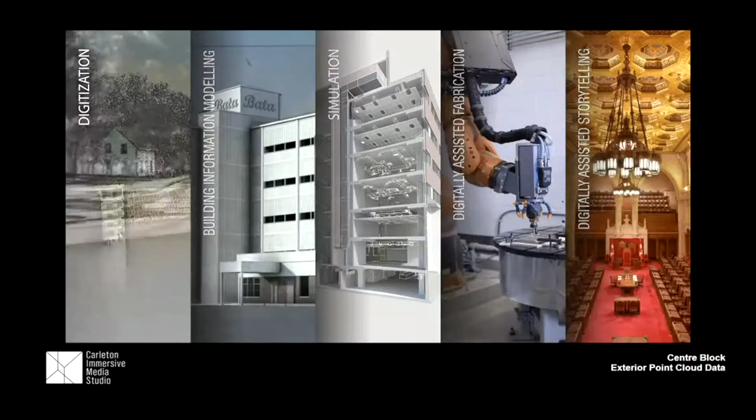As introduced, my name is Katie Graham, and I work at the Carleton Immersive Media Studio, which is a research lab associated with the School of Architecture in Ottawa, Canada.

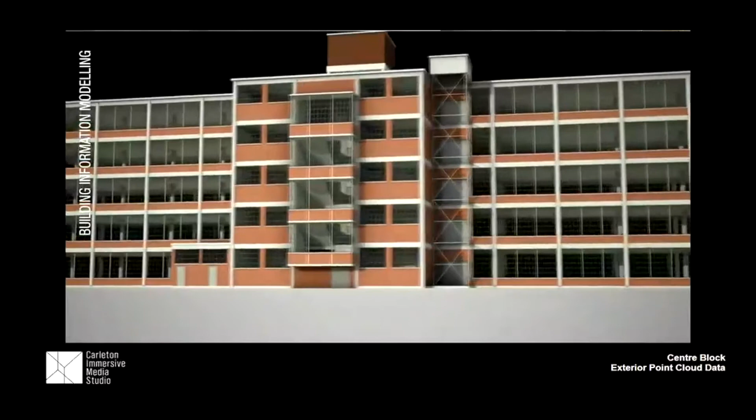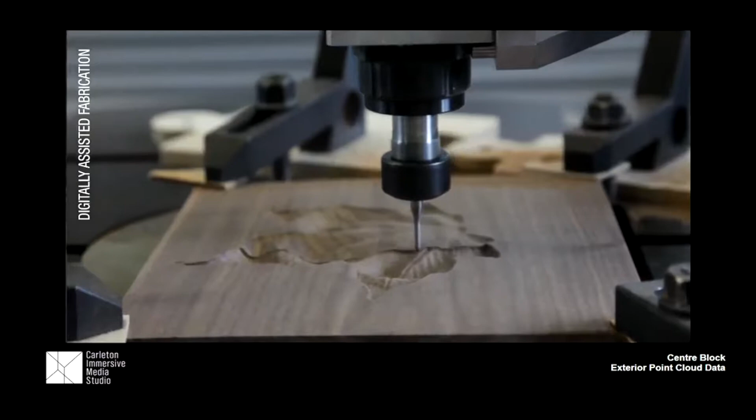We focus on 5 different streams of research that all have to do with how we can use new and emerging technologies to help in heritage architecture. The first is digitization, where we do point cloud and photogrammetry to record the heritage spaces. Building information modeling, where we convert that data into a model using Autodesk Revit. Simulations, where we use those models as an analysis tool. Digitally assisted fabrication, where we have 2 KUKA robots that are 6-axis robots that we use to assist in different milling for heritage purposes. And digitally assisted storytelling, where we take all of that information and figure out a way to share it with the public.

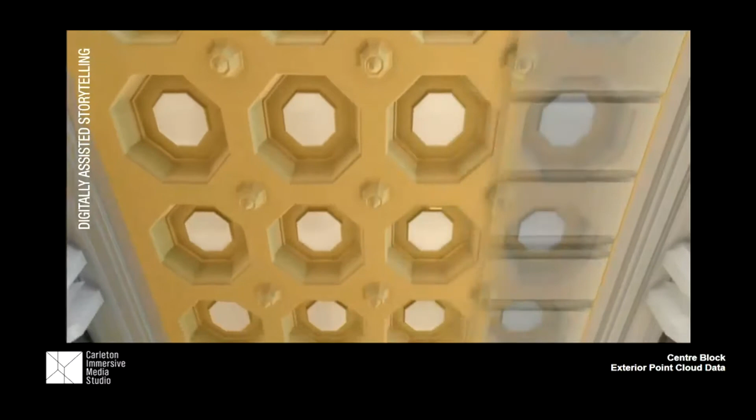I am the team lead for the digitally assisted storytelling projects, where we use web, mobile, augmented reality, and virtual reality for this dissemination. Today what I'm going to be talking about is how, for some of these projects that focus on virtual reality, we've used some of the things we've learned from building information modeling and the level of detail system there to help create narratives that flow better, a level of detail for narrative spaces in virtual reality.

Hold on. We can also use the keyboard. Okay, yeah, maybe it's a disconnection. All right, so technical difficulties.

Many of our projects revolve around a significant project within Ottawa, the rehabilitation project of the Canadian Parliament buildings. This is the Centre Block, the main building of our Canadian Parliament buildings. It's about to undergo a 10-year rehabilitation project, which will close its doors, and all the parliamentary activities within it will have to move elsewhere, and the public tours common for school students and visitors to Ottawa will stop. So our work has a lot to do with that.

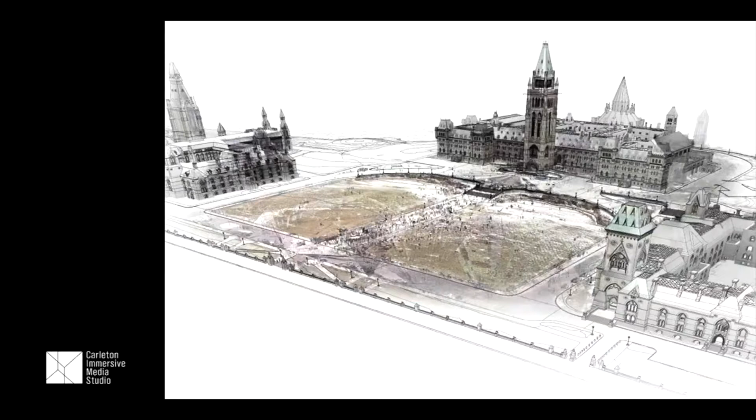We've actually been working with the Canadian government since 2013 on this rehabilitation project, when we began to help them document the overall grounds, which you can see here. This is Parliament Hill, and then we have the East Block, the West Block, and Centre Block. We helped document them through photogrammetry and point cloud data with another government agency called Heritage Conservation Services. Then we converted that data into a building information model using Autodesk Revit.

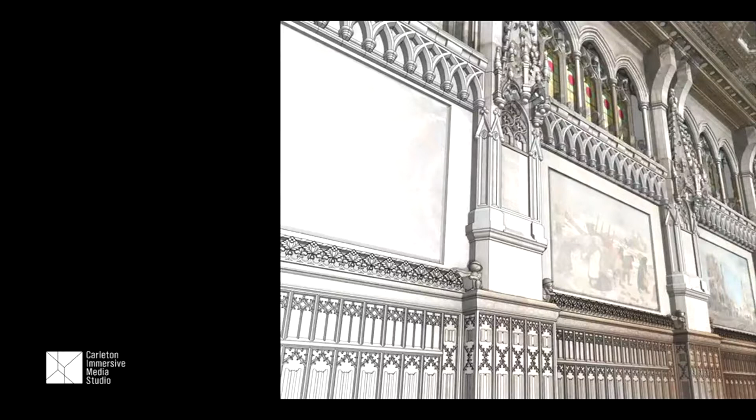Here you can see just how detailed our point cloud data are of the space. We have both interior and exteriors of all of the buildings. We've converted them into extremely high detailed models within Autodesk Revit. This is a detail of that building information model of the Senate chamber wall.

When we were developing these building information models, we were looking at the different level of detail systems that currently exist for building information modeling. I'm not really going to explain these since we already talked about them a bit today. But the thing we noticed in all of these existing protocols is that they all have to do with new construction, and with the different phases of construction as you move from design to the actual building being built and facility management. That level of development or level of detail kept progressing based off of that.

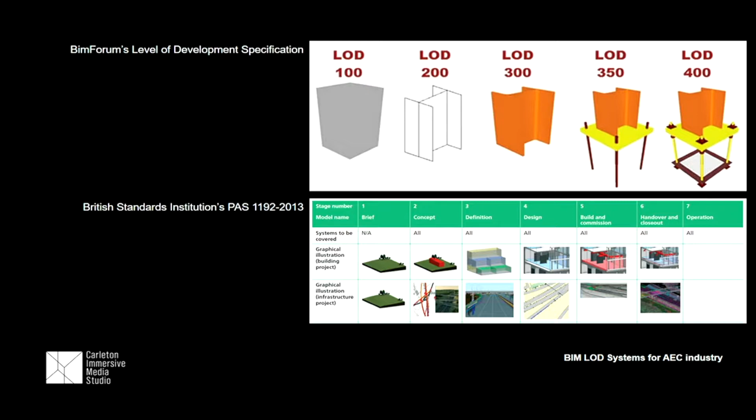But when we're looking at a heritage building, we're already at the built stage. So what level of detail do we put it in? We needed to figure out a different way to control what level of detail we should show within our models. So we created our own system that had a different purpose, and also a different approach, breaking it into 3 different categories.

We had the level of detail, which was the graphical information, the representation. We had the level of information, about the embedded information within it. And then the level of accuracy, about whether we were recording the different deformations and deflections that occurred within the model as recorded in point cloud. These were 3 different categories we could split apart so a different element within the space would have a different LOD, LOI, and LOA based on the information we had.

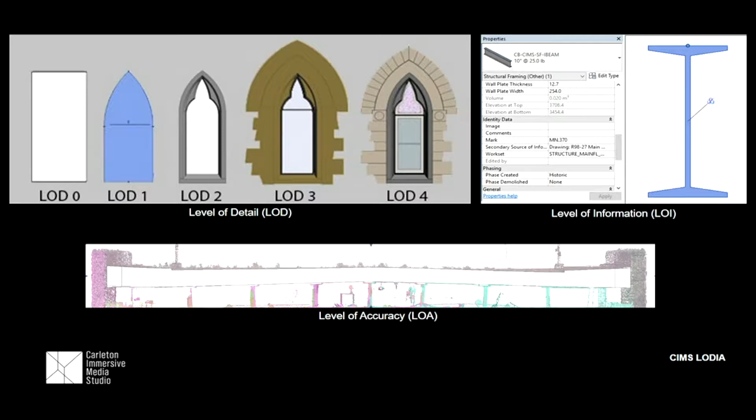So, as I said, I'm the team lead for the digitally assisted storytelling projects, and we've had a few different virtual reality projects that both have different passive or active qualities.

And then we stitched them together using Adobe Premiere and Adobe After Effects. There were also sound effects, some animations within it, as well as a narrator explaining what's going on in the space.

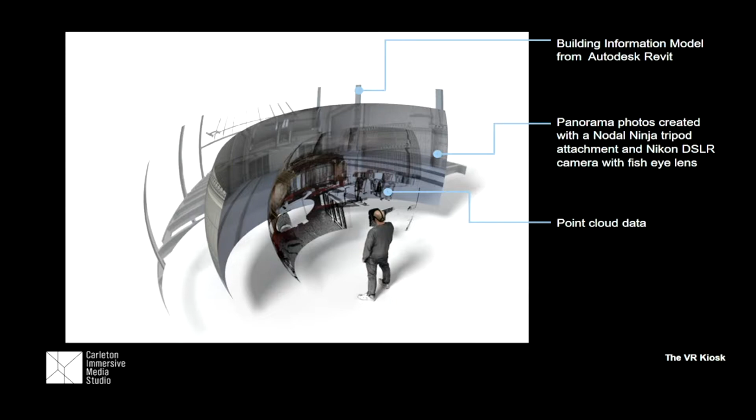So this is kind of some of that feel within it, this compiling of all the different details within it. And we were able to get some really good high quality images out of it.

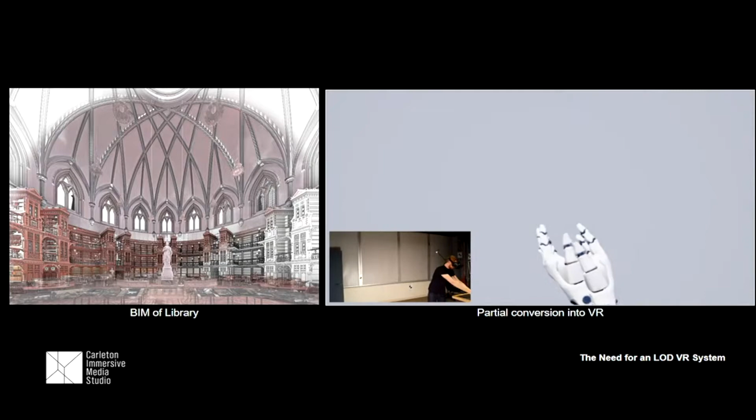But when we switched to active VR and the use of game engines, we no longer had a rendered output. We needed to have everything be viewed in real time. So you can see, which had a lot of problems considering our data was so highly detailed.

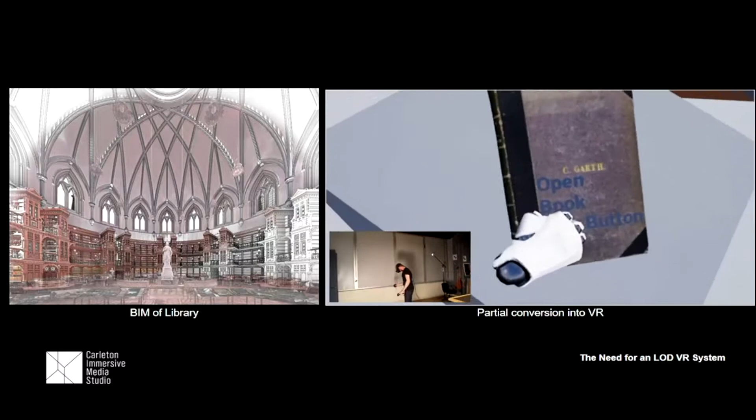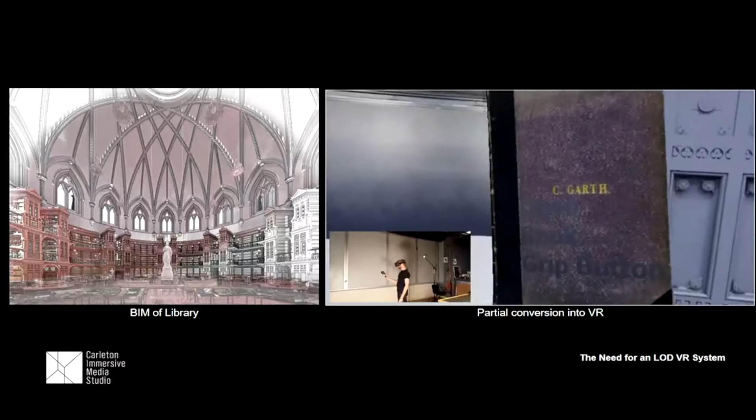So we have on the left the building information model of the Library of Parliament, one of the spaces within the Parliament buildings, and on the right we can see how we first started converting it. When we first translated that data, it was too heavy to actually run, so we had to cut the space into a sliver. Only 1/8 of the space was shown, as you can see.

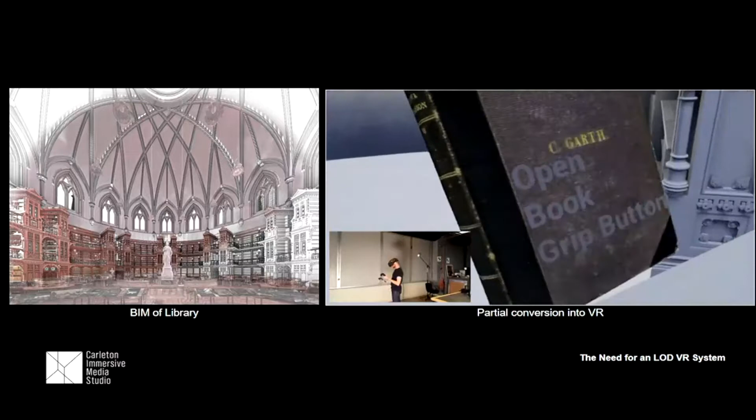This really made it so then we realized we had to figure out a way to decide what we were going to show and at what level of detail, which is when we started looking at existing level of detail systems within computer graphics.

In the 70s, someone named James Clark introduced the idea of discrete LODs, which had to do with where you were, your proximity to the objects. He pretty much stated that things that are farther away don't need as high a level of detail because your eyes just don't work like that.

So objects closer had to have a higher poly count, whereas objects farther away did not, as evident from this rabbit that he had 4 different variations of, one being 69,000 poly count and one being 76. But when they're staggered apart, they all look the same.

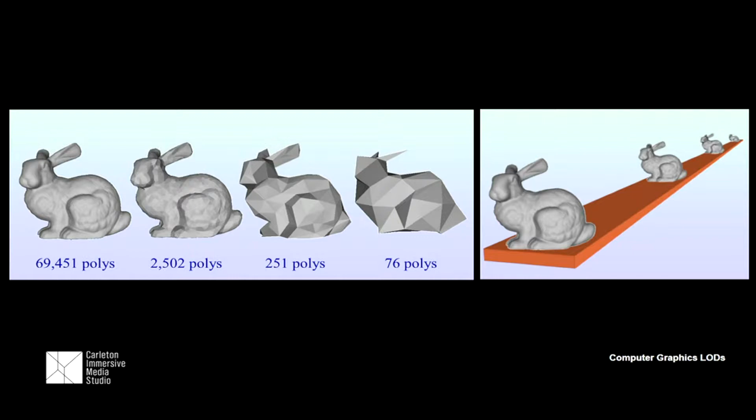So that idea of the point of view based level of detail, we actually did incorporate when we did the VR Kiosk, when things that were farther in the distance weren't as clear and crisp. And this actually helped us with our storytelling techniques, that when we had the crisp renderings close up, it really made it that be what you would look at.

So we knew that this would help us in creating a narration and a narrative flow within our VR experiences, even if we lost the control of a passive VR experience that you could really lead someone through.

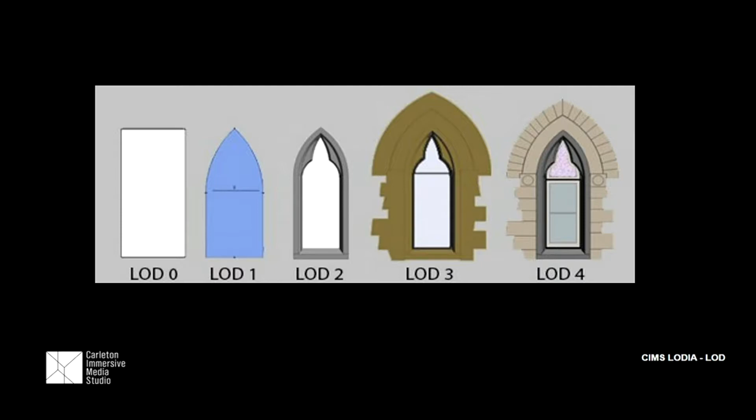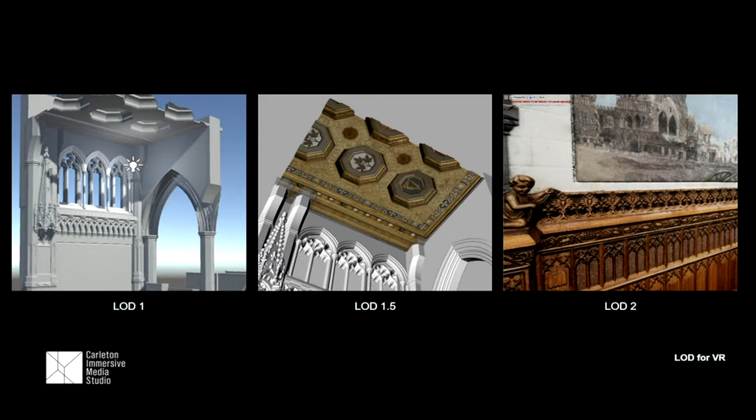So what system did we make then? We made a 3-tiered system that had LOD 1, 1.5, and 2. And we kind of started to outline how these would be built.

The LOD 1 elements were converted from the building information modeling pretty much directly. There's a lot more steps involved, but I'm just going to say they were converted and optimized, though it's a lot more labor intensive than that. Our initial idea was that they wouldn't be textured, but later on we had generic textures that weren't specific to real world conditions.

Then when we moved into LOD 1.5, this is when we actually needed to texturize them using real world conditions. So it was the building information model converted into Unity, texturized with either photogrammetry data, point cloud data, or a photograph.

And then the last one was LOD 2, which was when we wouldn't use the Revit model anymore, the BIM model. We would actually create a photogrammetry model out of the information we have. This was reserved for very important, significant items.

So I'll go now into a bit more depth of each one.

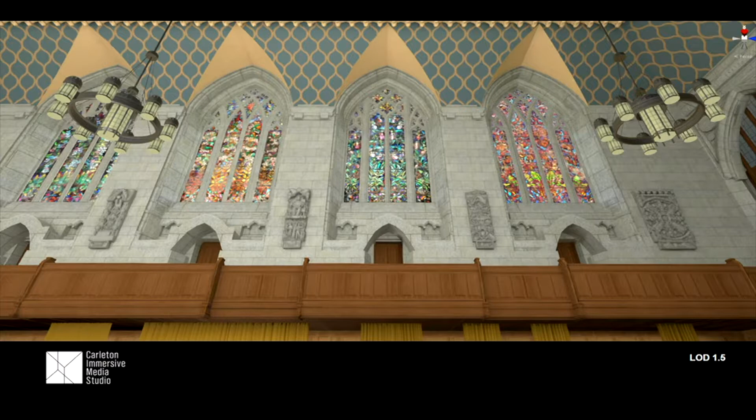We had the planar surface of the window from the point cloud from the Revit model, and then we brought in the texture from high quality photos. Same for the ceiling in the Senate foyer - the ceiling is very important, so we took the photogrammetric data and got an image from it to texturize it, which you can see compared to the rest of the building at 1.5.

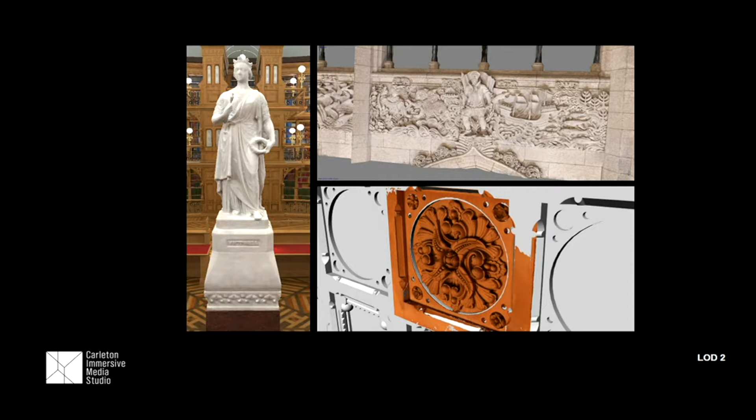LOD2 items were reserved for the things that were most important in the spaces, because they had a huge poly count associated with them, as well as being very labor intensive.

So we really just wanted to use them for key spot elements, such as statues - that's a Queen Victoria statue in the Library of Parliament - or stone reliefs on top, like the Canadian frieze within the House of Commons foyer. And also for smaller items that you really need to draw someone's attention to, like these small wood carvings in the library that were about this big that you really wanted to pull someone in.

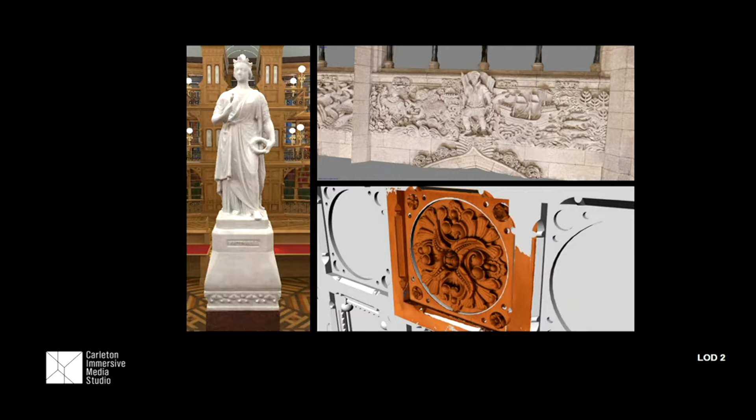Okay, so that's how we categorized them. But to decide when we would use certain things, we looked at 3 different factors: proximity, significance, and storytelling.

For proximity, this is always a bit tricky, considering in VR you should be able to move around. But the way we were looking at VR is that you have a certain point of view that you can move around as far as your tether allows, since there's always a tether, but you couldn't actually teleport between different spaces.

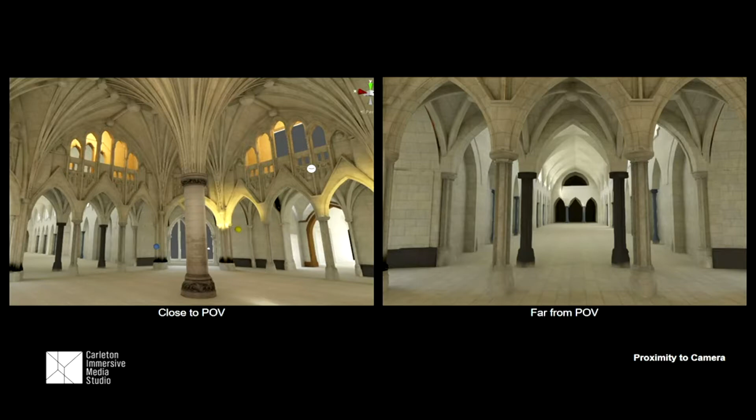So we would try to reserve all of those LOD2 and LOD 1.5 items for things closer to you, and we'd even spend more time on the processing and cleaning of the LOD1 items in that space. So things close to you would have heavier poly count and higher level of detail, whereas things farther away could kind of disappear a bit.

The second factor was significance - certain things in a certain room would have a different level of significance. It might not be important to the narrative of the space, but it would be important to the heritage quality of the building. To compare how that would work, we can look at the same condition in 2 almost identical spaces: the House of Commons foyer and the Senate foyer.

In the House of Commons foyer, the door to the chamber is just a simple wood door. In fact, it's always left open, but in our model it was closed. There's nothing really unique about it - it's a beautiful door, but it has no actual heritage or cultural significance to the space.

But in the case of the Senate, that door is incredibly important because it has the individual crests of all the provinces and territories of Canada, so it needed to be included at a higher level of detail. So in this case, for the House of Commons foyer, the door was at LOD1, but in the Senate foyer it was at LOD 1.5, to make sure that heritage quality and significance was shown in the space.

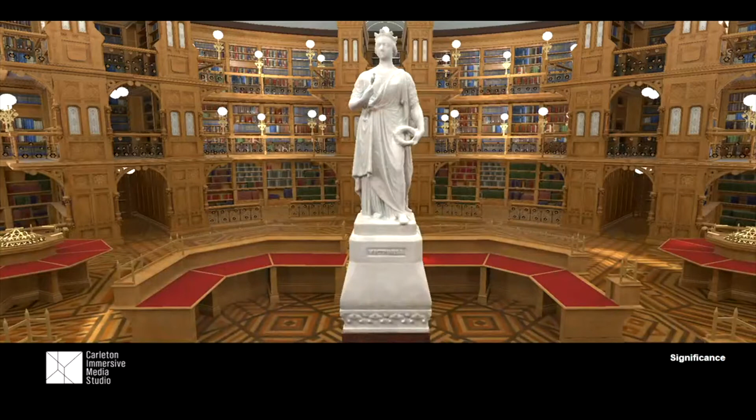Same in the Library of Parliament, that Queen Victoria sculpture statue is the most important thing in the space. Some might argue the books are more important, but it's actually the statue that follows you around and kind of stares at you wherever you are. She is the focal point of the space, so she had to be at the highest level of detail of anything else in there. She was reserved as the LOD2 item, along with a few other small pieces.

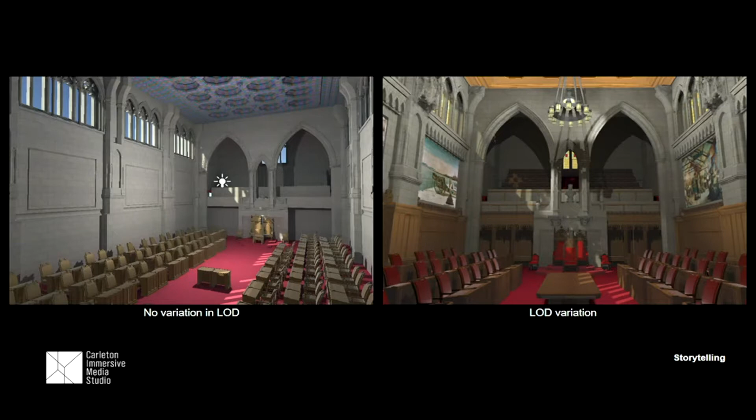So the last idea was storytelling. We thought that by choosing certain things to be at a higher level of detail, it would draw your eye to them and help in aiding that whole narration going through it. So these are images as we've been working on the spaces.

On the left, you can see the Senate chamber with everything at an LOD1. There's nothing that really is striking and draws your attention. Your eye just keeps dancing around looking at all the different factors. It's still a nice space, but you're not really drawn to a key element.

Whereas on the right, as the Senate chamber progressed in its development, we start to bring in elements at a higher level of detail, and your eye is starting to be drawn to them. You're drawn to the war paintings on the wall that are LOD 1.5. You see these stained glass windows in the background at LOD 1.5, and then you see the chairs, the speaker's chair. There's a shadow on it so you don't see it that great, but it's at an LOD2, as well as the sculptures around it.

Your eyes are starting to be brought to this, but what you're not looking at is the furniture and the desks—they're there, they help make the space. The wood paneling on the walls is nice, but you're not drawn to those spaces or those items as much because they're not at as high of a level of detail.

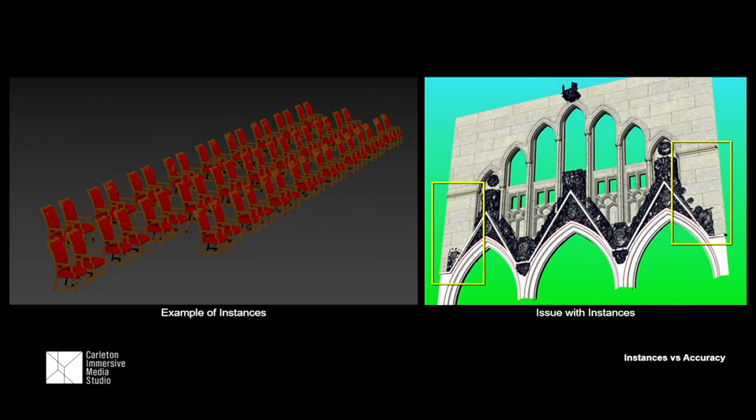So that's great, we've generalized all of the different columns in it. But the LOD2 items are still a record of what is actually accurate to the real world. When we start overlapping the LOD2 items and the LOD1 items, we're coming up with some conflicts, which you can see here—the wall and the carvings on it are now starting to collide funny. So we fixed that, we kind of manipulate it to make it work, but it's definitely something causing a little bit of struggle in the lab.

Then the next is the idea of realism. I hate the word realism—it's definitely been a problem in this project. That's because the first time, when we first wanted to do LOD1, the idea was no texture. Then when we decided we need some kind of texture, it was going to be generic textures we could repeat over and over again. But that actually was more distracting because the wood grain wasn't right, it didn't go in the right direction, it was too large, things like that.

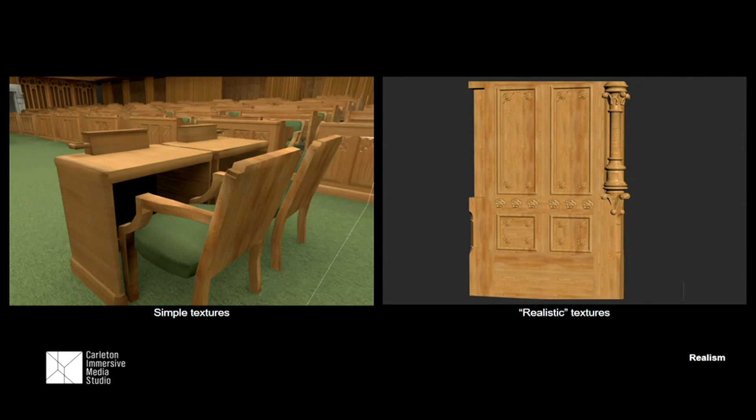So we now have to spend a lot of time painstakingly getting the direction of that wood grain right, and that's making LOD1 become more realistic and more accurate to the real world, even though we're still using generic textures. But the other way, it was not blending into the background.

Just to finalize—this isn't an issue, this is just an image. As the project keeps going, this idea of realism and quality and level of detail is definitely something that's been fun to experiment with. But we're still trying to figure out exactly how it can lead through the narration, because in the end, is the narrative the same as the cultural significance of the building? That's one of the things we're trying to figure out. So, thank you.